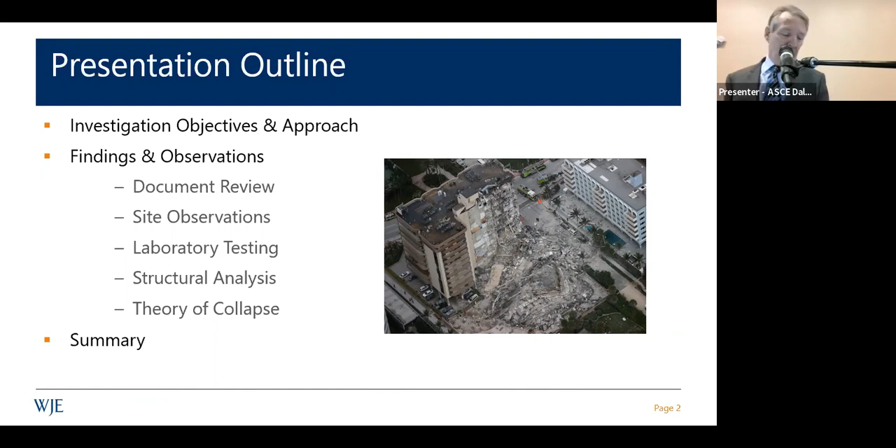I'll first outline our investigation objectives and approach, talk about findings and observations in the various activities - document review, site observation, laboratory testing, structural analysis - and then get into the theory of the collapse, and I'll try to wrap it all up in about 30 minutes.

In terms of investigation approach and objectives, fairly simple. We did these steps: reviewed documents, investigated conditions at the site, conducted laboratory studies and structural analysis, all aimed at determining the root cause. Matt Fadden and I were involved as experts in the civil litigation, and that's how we got involved in this project on behalf of the ownership of the condominium association.

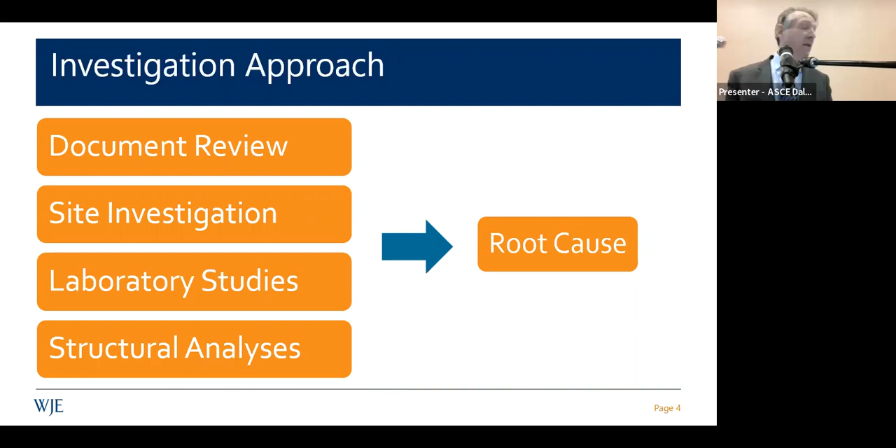Let's get right into it.

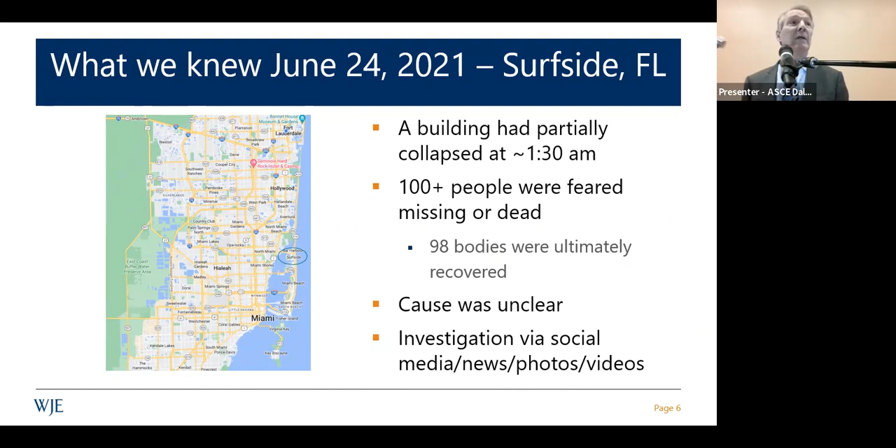Here's what we knew going in on June 24th, 2021. The building had collapsed at 1:30 a.m. Initially, 100 plus people were feared missing or dead. Ultimately, 98 people perished in the event. The cause was unclear. There was a lot of speculation, as you might imagine, in social media and other sources, some of which was actually very helpful.

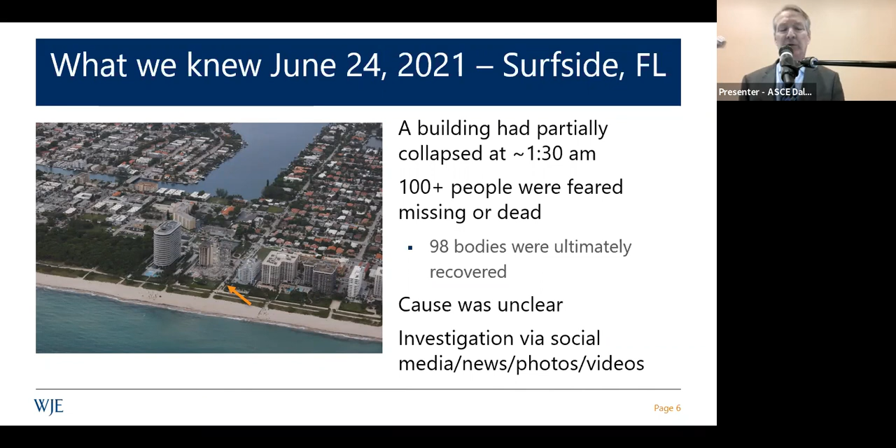Here you see the site in Surfside, Florida, which is north of Miami Beach, a very high-end area and becoming increasingly so, especially the oceanfront properties.

This is a photo after the collapse. To the right is the eastern portion of the tower, which had pancaked down, and where, of course, most of the people perished. And to the left, you'll see the swimming pool and the pool deck surrounding the swimming pool.

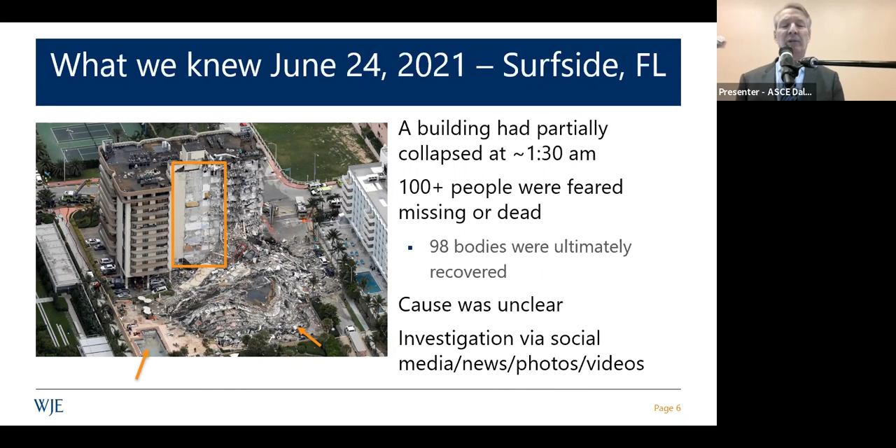It's a little hard to see at this scale. You'll see in the next slide a closer view of that pool deck, which was supported above a parking garage, and that had collapsed onto the level below. Those circled areas are columns that are poking up through the pool deck, indicating a punching type failure.

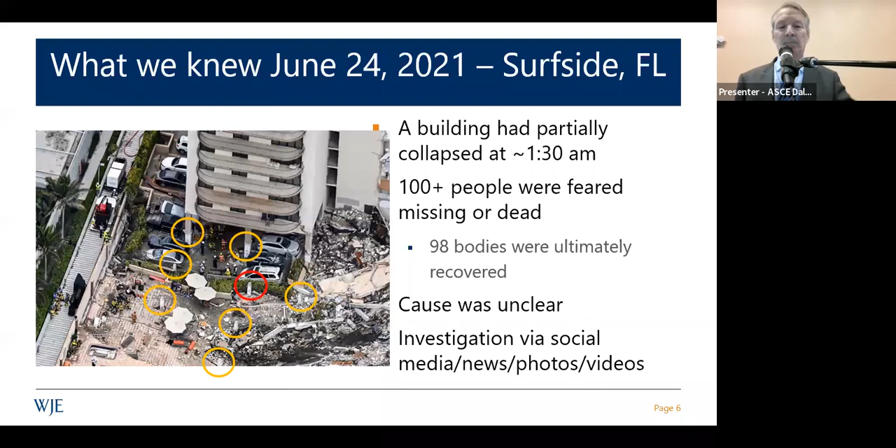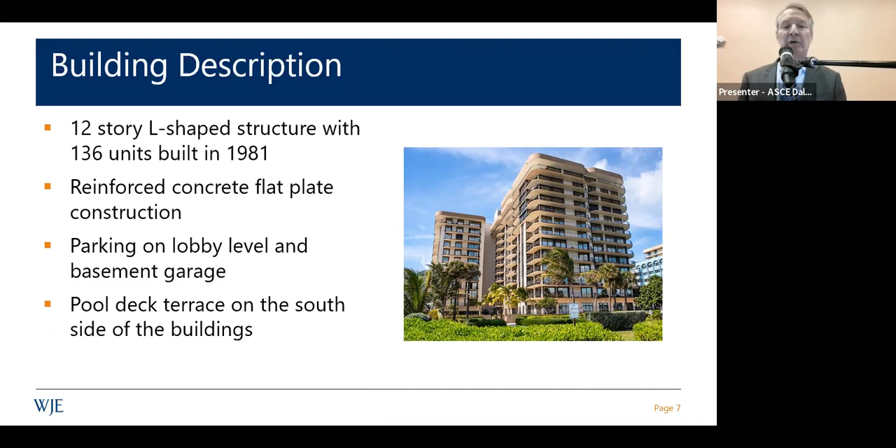The 12-story building is L-shaped in plan, 136 units built in 1981. It's a flat plate construction. There you can see what flat plate looks like if you're not familiar with it - just columns and slabs.

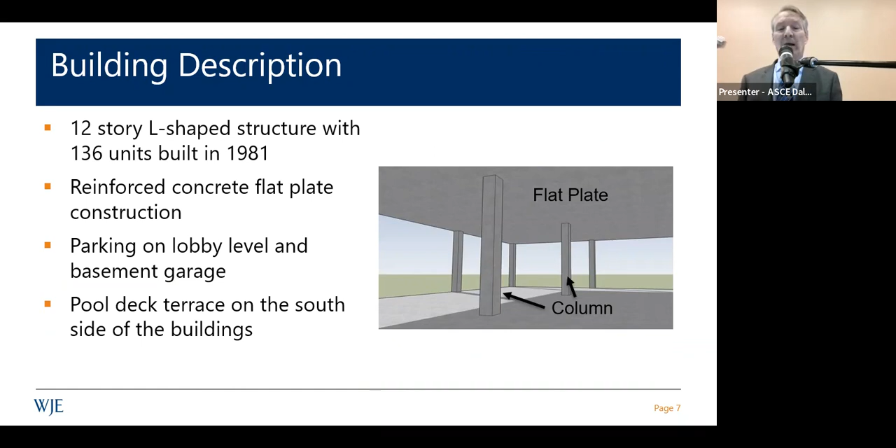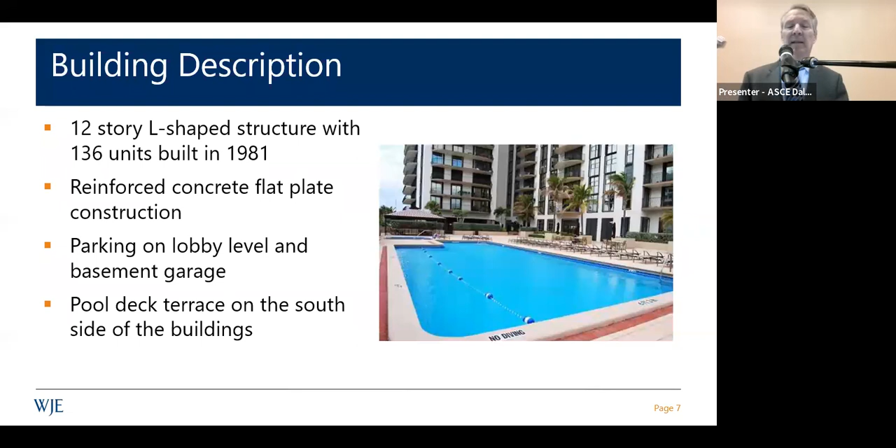There's a parking garage on the lobby level, and there you can see the parking structure and a pool deck terrace on the south side of the building. There's the pool deck and the pool and the pool deck that surrounds it. In plan view, you can see the pool deck in the southeast portion of the property and the tower that surrounds it, and the entrance area to the west.

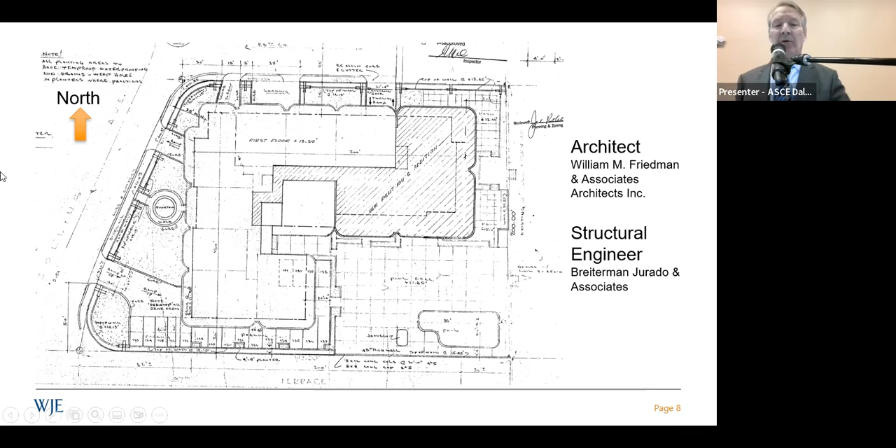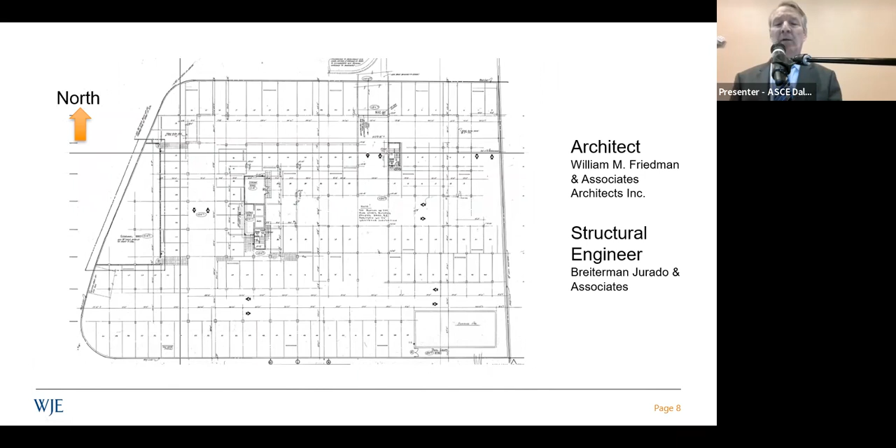We're going to talk about that entrance area in a minute, but I wanted you to be familiar with that plan. The next image is of the level immediately below this entrance level, which was devoted entirely to parking, like a lot of structures of this type. They have parking in the lower level, and that's why the pool deck was elevated. That's the point.

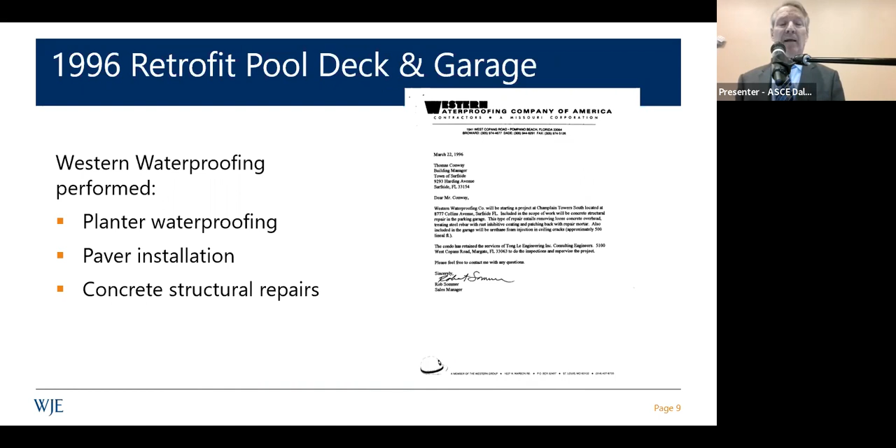Let's go through some of the history found in the documents. In 1996, there was a retrofit where there was new waterproofing, including waterproofing of the planters, installation of additional pavers, as well as concrete structural repairs. All was by Western Waterproofing, was signed off by a structural engineer. And the point is they added load in terms of new pavers in 1996. We'll get into that.

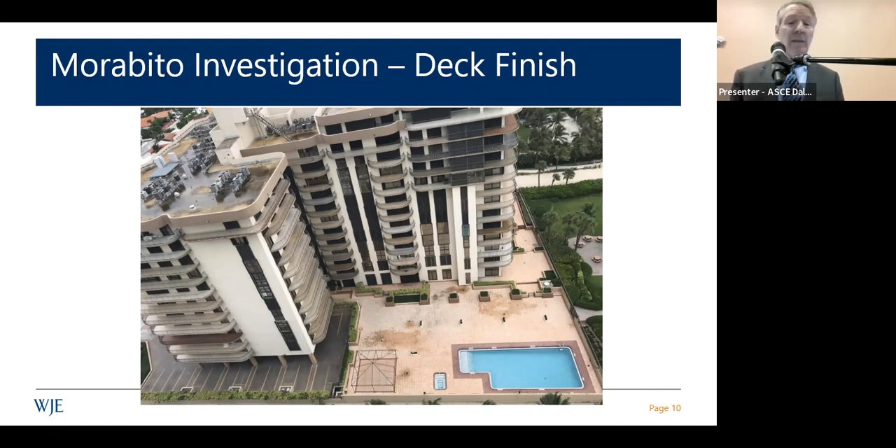The building was approaching 40 years old, and in Florida, after 40 years, you have to recertify the buildings. They hired a firm called Morabito to do that, and they were in the middle of an investigation. We learned a lot from some of the investigative work that they did.

I want you to focus in now. Here's another plan view, focus on this rectangle. I'll blow it up. In two areas, they took concrete cores, which we found to be very useful in understanding the construction of this pool deck - both in the parking area to the left and the pool deck area near the planters to the right.

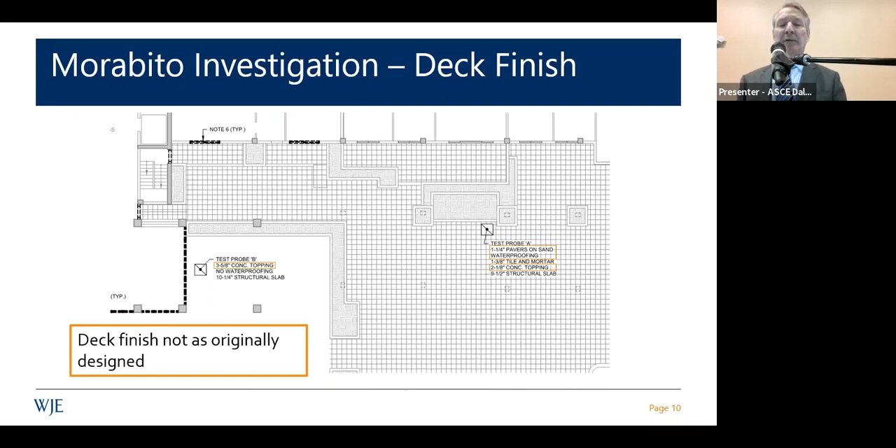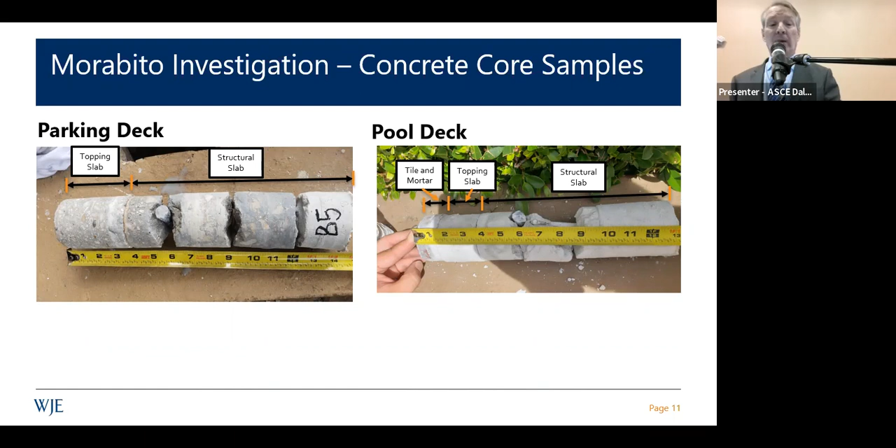Here you see the two cores that were removed, and they look all cracked up, but that's pretty common in the coring process to get these kinds of cracks. We don't believe they were pre-existing cracks. But I also want you to notice in the parking deck, the topping slab. In fact, in the pool deck, there's also a topping slab. That was not clearly shown on the original design drawings, but it was clearly part of the original construction because the tile and mortar finish was specified. So they must have known about it, but again, it wasn't on the drawings that were issued to the building department. So, thick topping slab - keep that in mind.

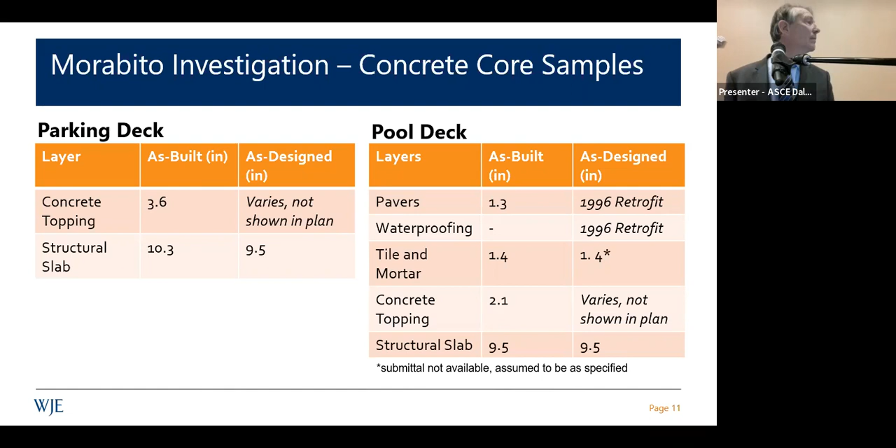Is there another way to fast forward? This doesn't work. When I raise my hand, advance the slide.

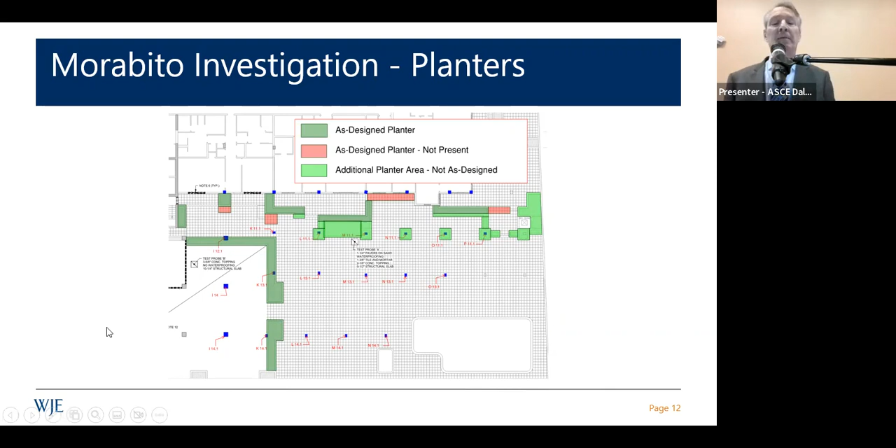One of the other things we found from the Morabito investigation is the planters weren't the same as shown on the original drawings. Those shown in dark green were original and matched what was there. In light green were added planter areas, and in that pinkish color were planters that were planned but removed. The point is there's some additional load from planters as well.

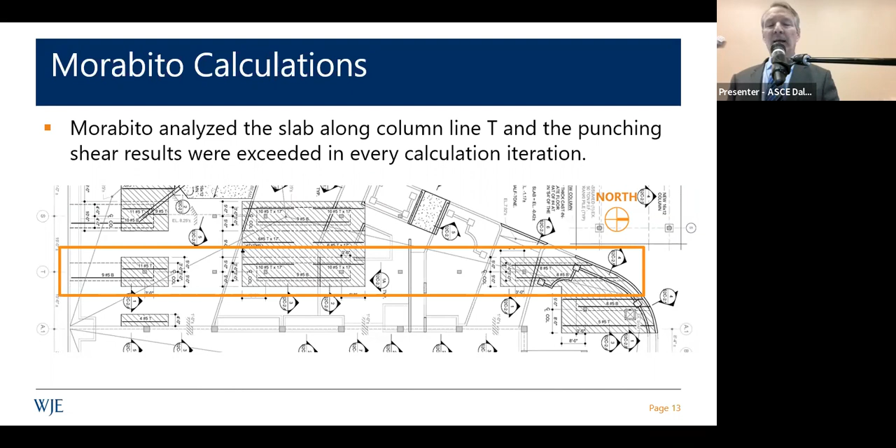In that analysis, the computer spit out the punching shear stress, and in every case it was exceeded. But apparently they did not act on that particular finding or ask the same question of whether punching shear was exceeded elsewhere in the structure.

It has to do with the original design. I just lost all my slides. Maybe we should take questions at the end, but that's a great question. I'll get into that before we're done.

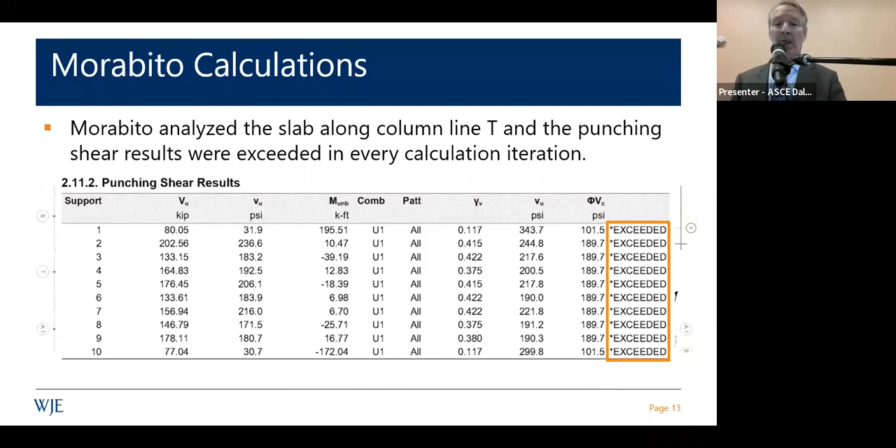There was a walkthrough video of the structure that we were able to get hold of, and that told us a lot about the pre-existing conditions before the pool deck collapsed.

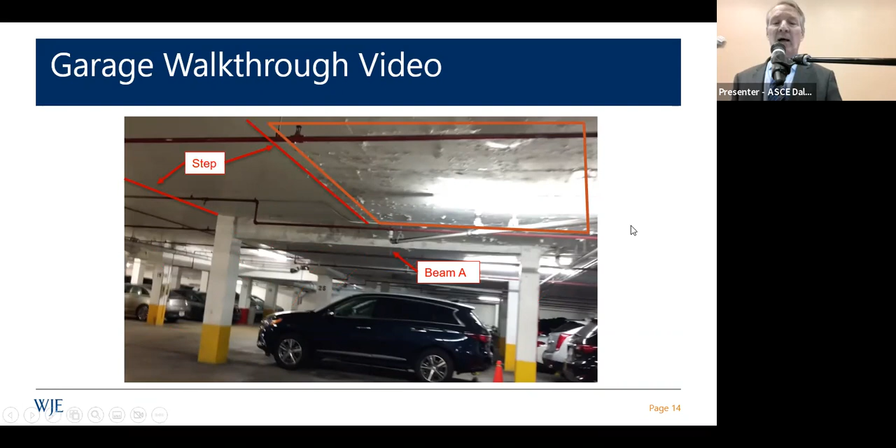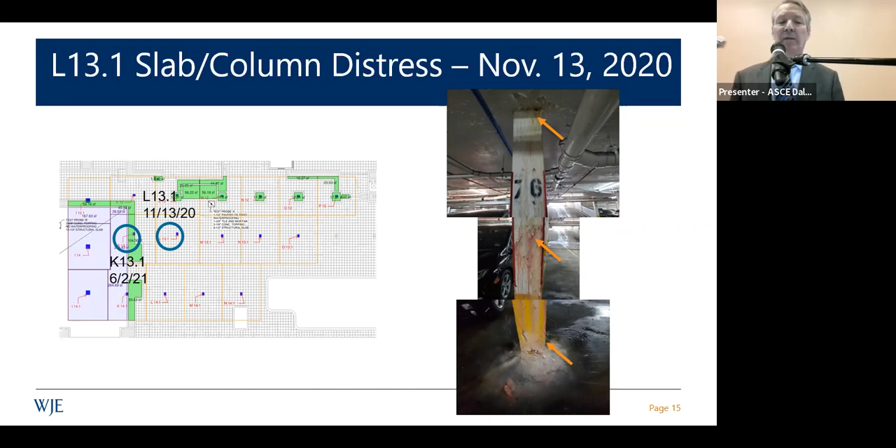In that video, we were able to piece together that mosaic photograph on the right, and at column L13.1, circled in the diagram on the left, there's a lot of water coming through at that column, and you can see the deposits at the base. That can happen when there's punching shear distress, or shear cracks in the vicinity of the column, and water can find its way through those cracks. Not exactly a smoking gun, but some indication that there may have been a pre-existing problem.

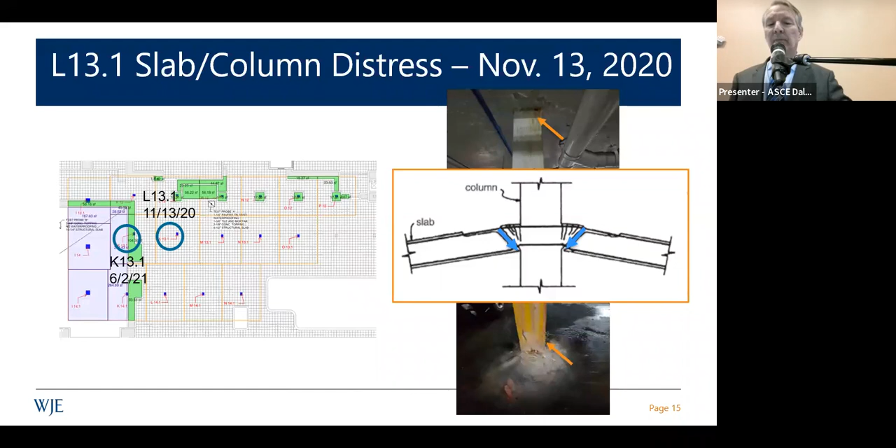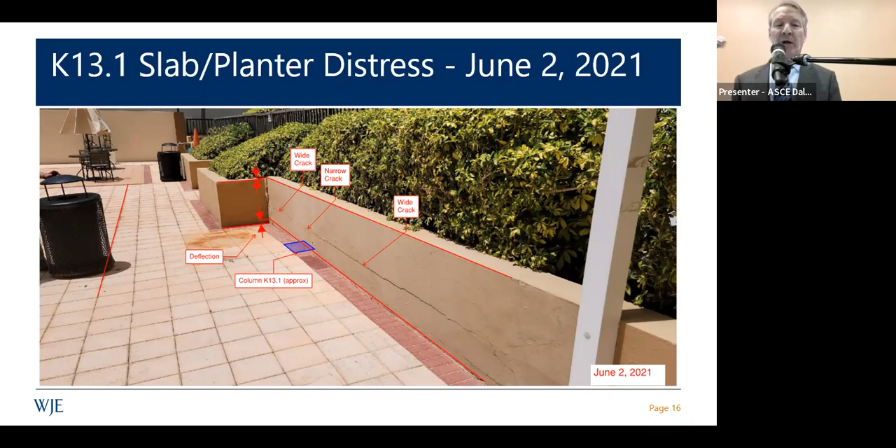That garbage can you see at the far left was removed so they could take that photograph, and you can see the rust-stained area from the garbage can. There's a close-up of the faulting. Unfortunately, that was noticed but dismissed as something to do with the planter itself, not the underlying structure.

This slide is from April 2020. The previous slides were from June 2021, just three weeks before the collapse. Now here we have a year or so earlier, and none of that distress exists, right?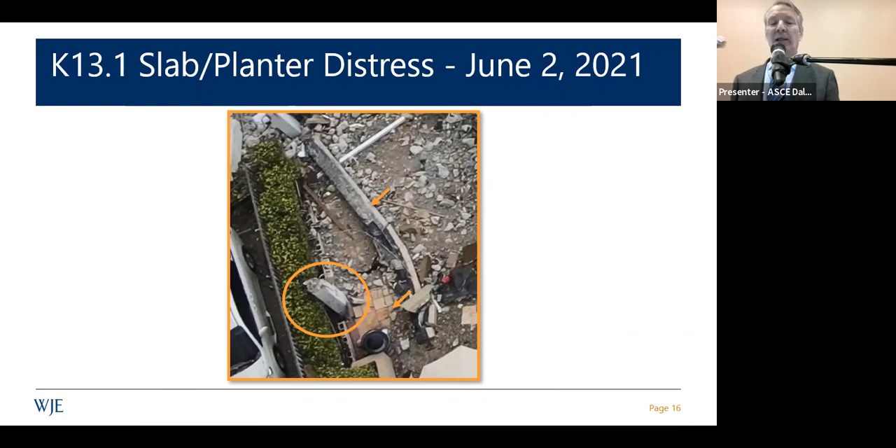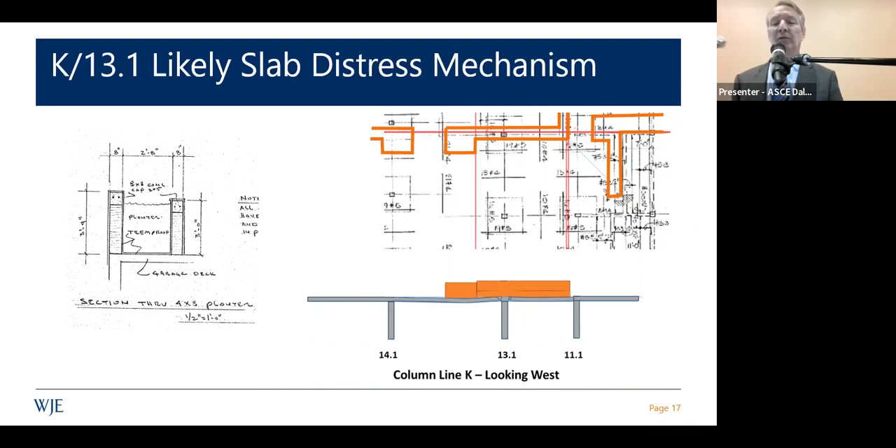So what we think happened is those spans had begun to sag as there was rotation near column 13.1. A blow-up of that sketch shows the horizontal cracking in the planter walls, as well as the faulting between the two sections of the planter, consistent with significant structural distress that was pre-existing.

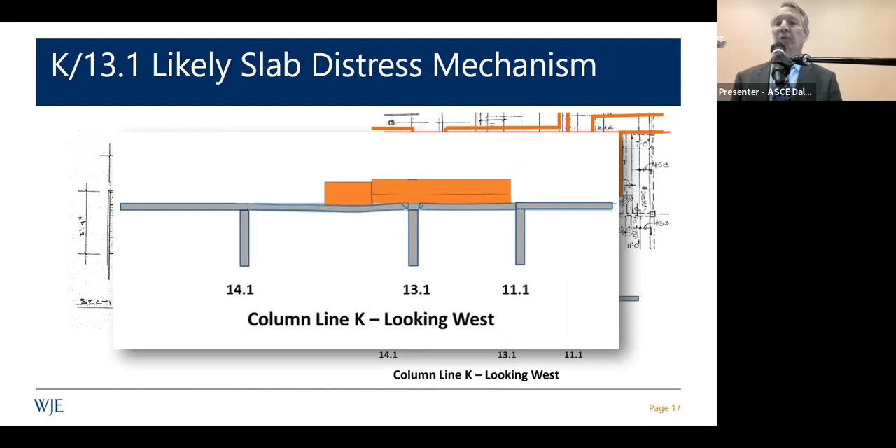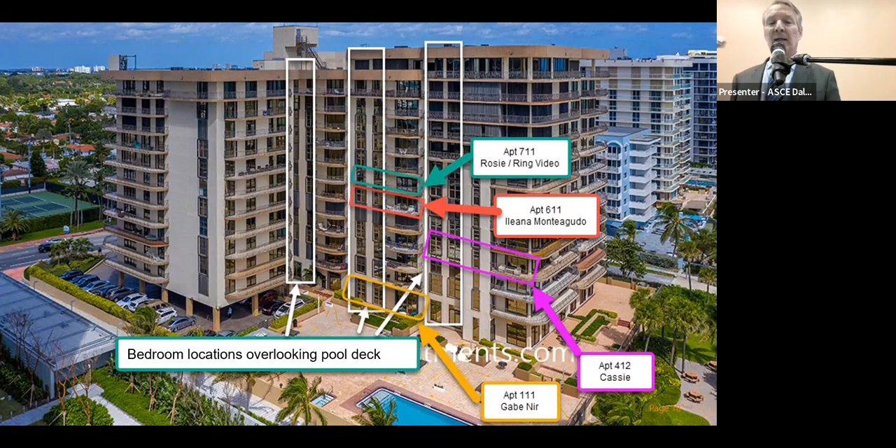This is a little bit tedious, but there were several events between 1:10 and 1:15 or so that related to the pool deck collapse. The security guard felt rumbling and saw white dust in the air, and heard a very loud noise. The building began to sway, and guests in the Bluegreen Resort, which is to the north, heard a loud crash and felt the rush of air rushing from the garage.

All those were consistent with the pool deck collapse. Now, it's not until 7 to 12 minutes later that you have the building collapse, and there were 3 columns you'll see from these videos. I'm going to focus on these 3 events, starting with the guests at the Bluegreen Resort.

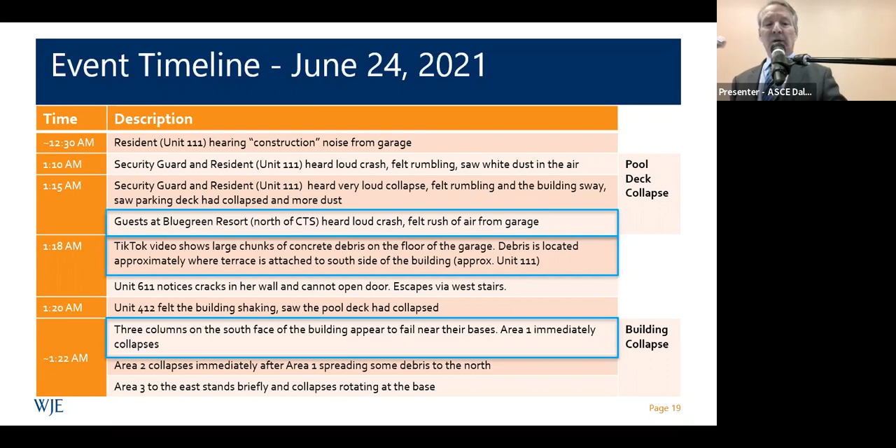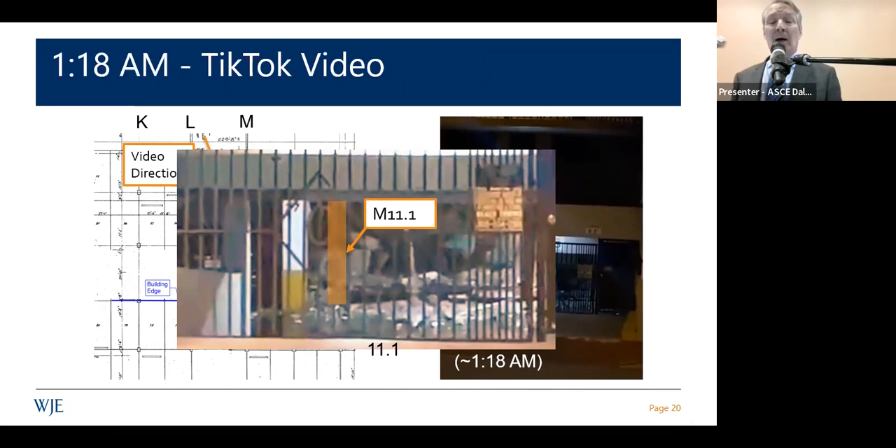This is a video taken from the north looking into the parking garage at 1:18 a.m. We did the best we could to enhance that photograph, and you can see the debris already lying on the parking garage floor. You can see a couple of columns in the garage. One column in particular was not there, may have been knocked down - we're not entirely sure. At this point, the building is surviving, but the pool deck had collapsed.

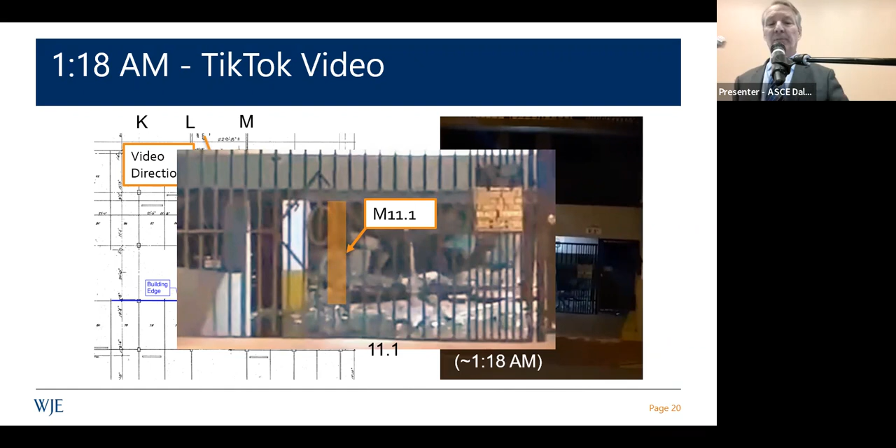Now we have a Ring video from Unit 711, which also overlooks the pool deck. This is kind of in between time, between the pool deck collapse and the building collapse, right in that 7 minute span or so. There's a lot of distress 7 floors above the pool deck collapse, indicating significant subsidence of those columns, but not immediate collapse.

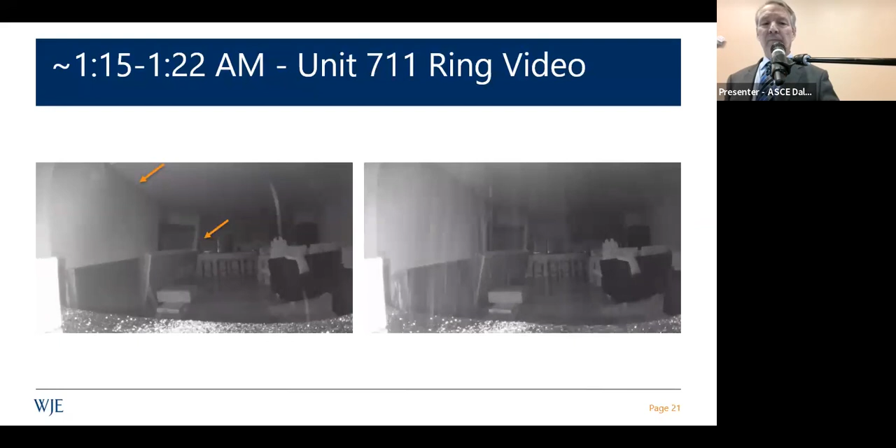Then by 1:22 a.m., we have this video from a security camera. You can see the Champlain Towers in the background on the video excerpt on the left. When you study that video, you see that the collapse started - it's in progress at this point - at the base of those columns on the south side of the tower, in the central portion, area 1, if you will. In the illustration on the right, area 0 is the pool deck. Area 2 subsequently collapsed, followed shortly thereafter by area 3.

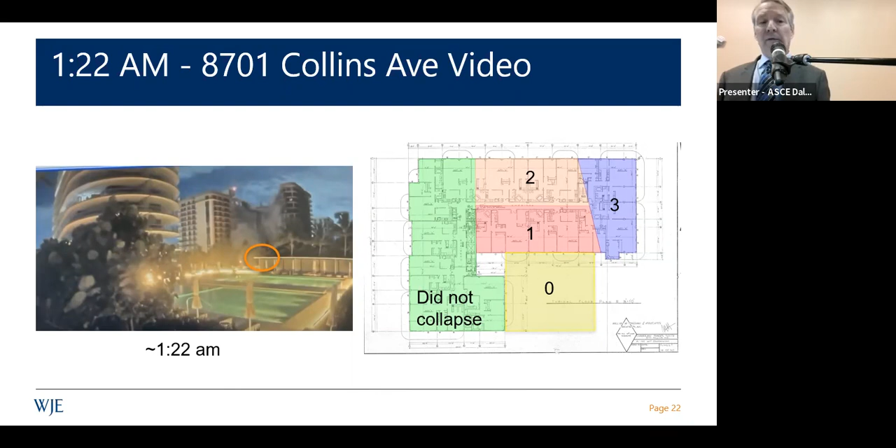So let's talk now about the site observations. This is the view of the site as we encountered it. We didn't get access until October of 2021. At that point, all of the debris had been removed by the National Institute of Standards and Technology.

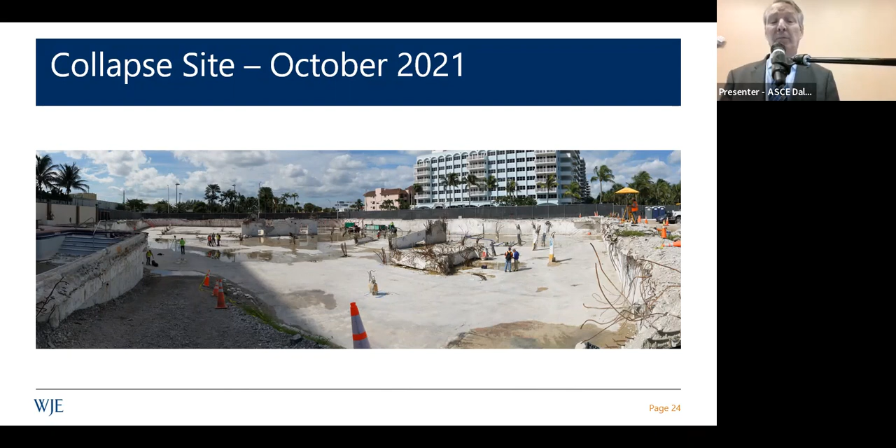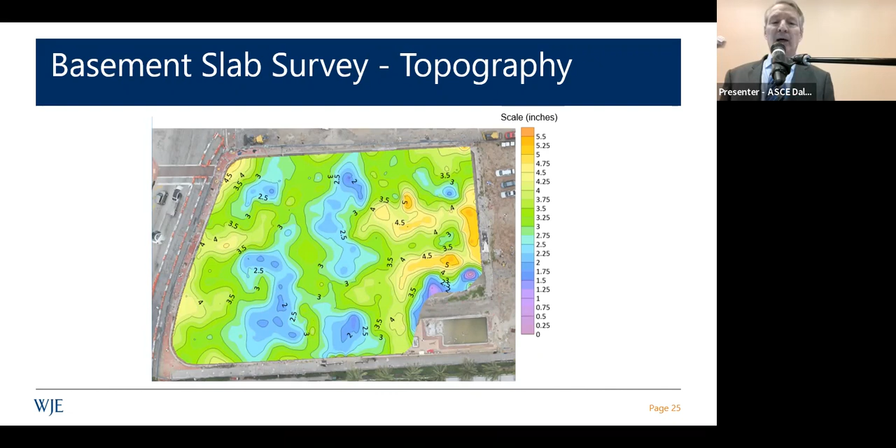But then we were free to do whatever site investigation, along with, in cooperation with a number of other engineering experts representing various parties in the civil litigation. One of the first things we did was a survey of the base of the basement slab, the parking garage slab essentially. This is the survey results, and it was extremely flat. There was a lot of speculation, as can happen in karst formations in South Florida, that you have a foundation failure of some type, but that was not indicated by this survey of the basement slab.

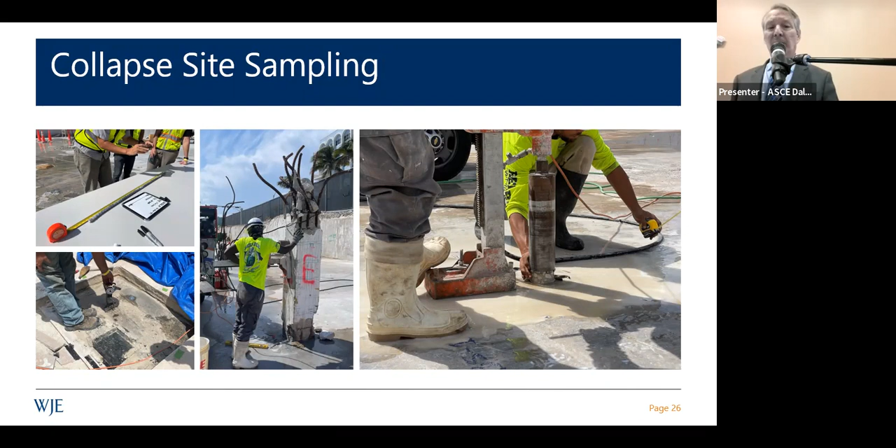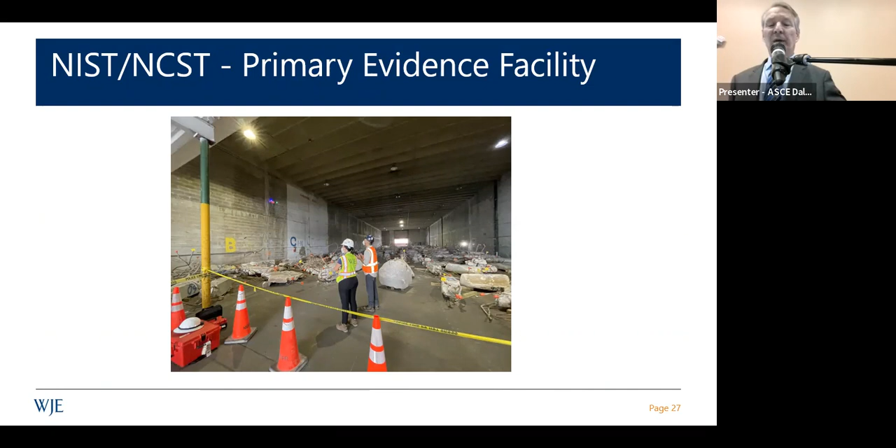We did a lot of sampling at the site of the concrete and the reinforcing, several borings of the foundation, and I'm going to summarize what came out of all that. We also had access to what's called the primary evidence facility. NIST arranged for fragments to be removed and saved in a warehouse, and there you see a couple of our engineers in that warehouse. They were able to make this drone mosaic, if you will, of the specimens laid out in the primary evidence facility.

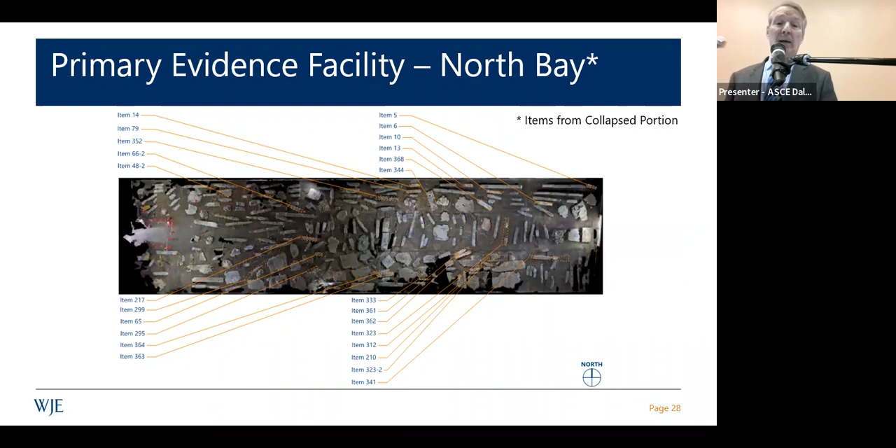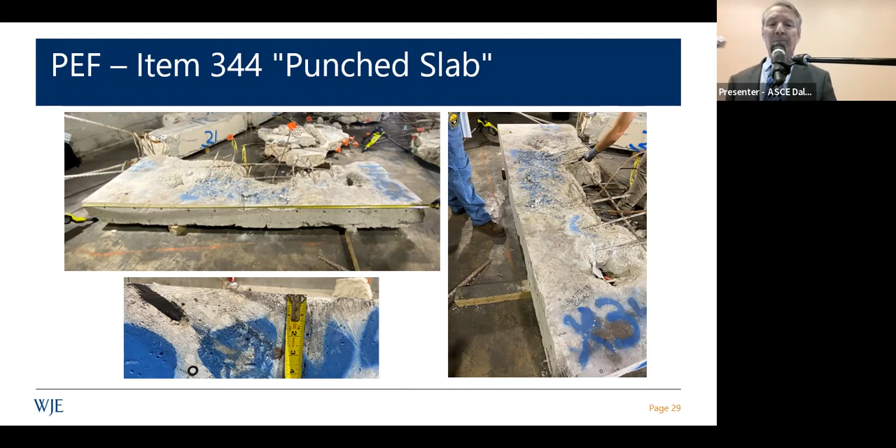That's one of the slabs that was at the primary evidence facility, and its appearance was consistent with punching failures.

Then the question is, how did this punching failure lead to the building collapse? I want you to look at the photograph in the middle lower section, a 3D image. It shows how the pool deck connected to the building in those 2 steps. The green beam is referred to as beam A.

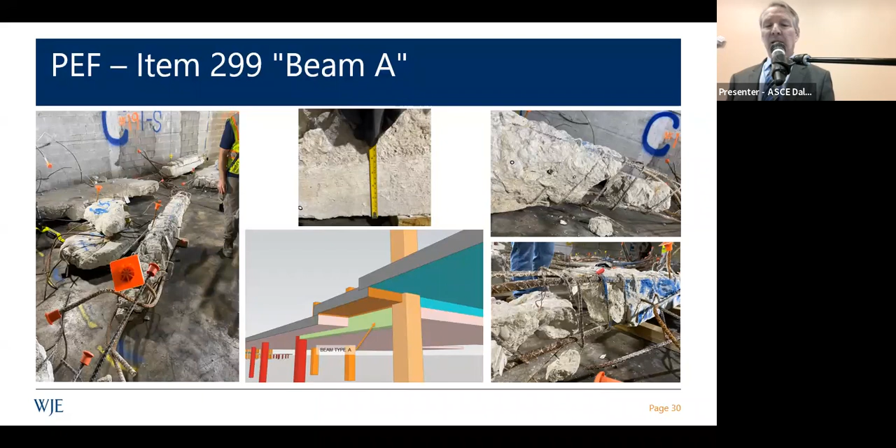What you're seeing are photographs of beam A, which were really too badly destroyed to learn very much. There were also portions of the column at the south edge of the building. This photograph shows that column at the connection at beam A, and that divot taken out of that column section shows that the depth of the reinforcing was more than expected.

Remember, this is at the top of a column where they're going to have a joint, and we're going to lap a lot of number 11 bars together. And apparently the cage was moved over such that there was pretty excessive cover. That becomes important for reasons I'll explain in just a minute.

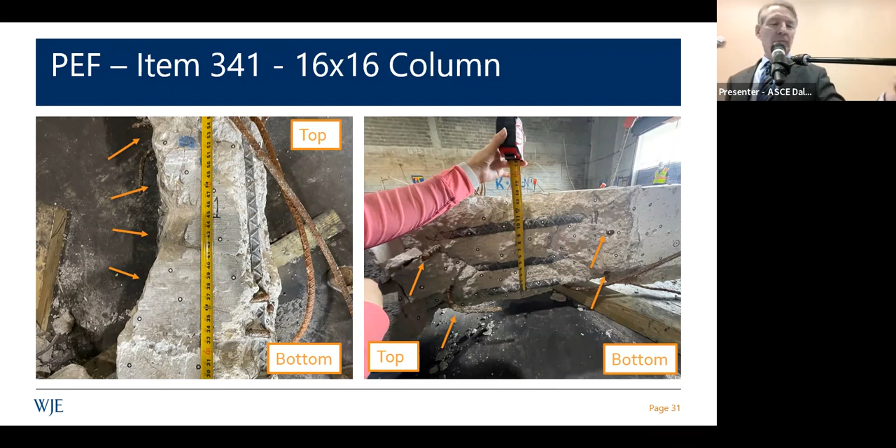So what do we find from all this? The concrete was typical to Florida. The corrosion was consistent with that at the time of concrete placement. No evidence of advanced corrosion we could find at the primary evidence facility, but there was some corrosion at the site nonetheless. Chloride levels were low, very little carbonation, and the steel and concrete strength were about as expected.

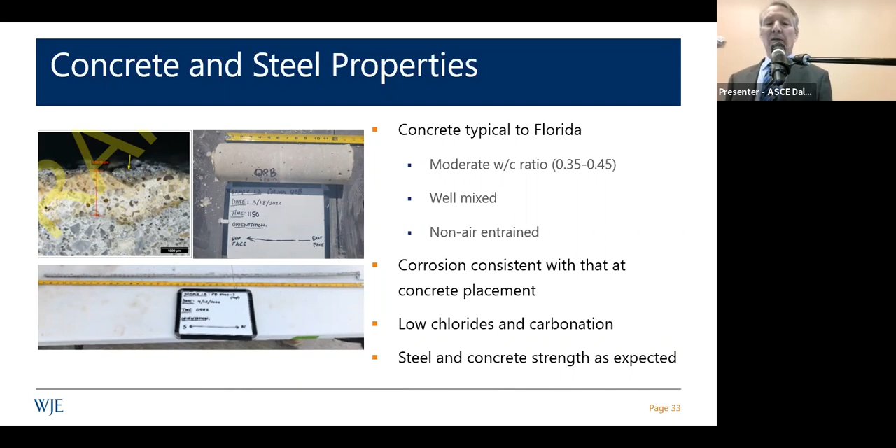So as I said, we're dealing here with punching shear failures. We believe that's what started it all, probably at the column circled in red, which is K13.1, where I showed you earlier had evidence of distress in advance of the collapse.

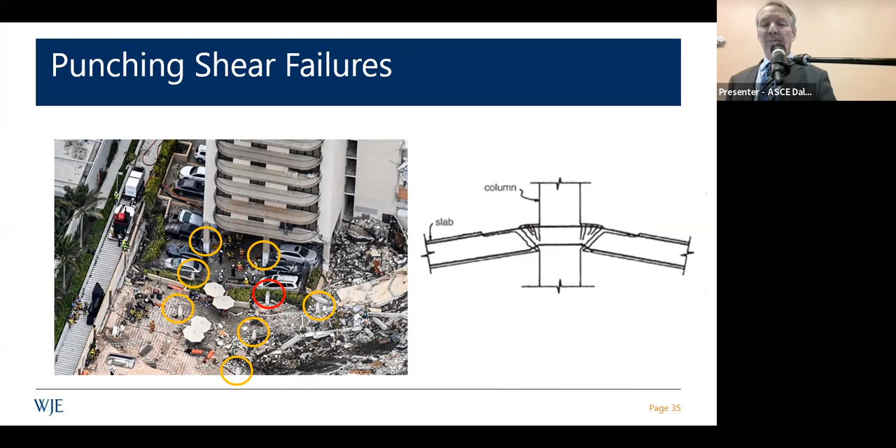When you do a design review in accordance with the 1977 ACI code, which was the relevant code, you find that it did not meet the design at the time by quite a margin, both with respect to bending moment and punching shear. Those red cells are ratios of demand to capacity, and they go as high as 1.9 or even 2 in some locations, particularly along the K line. So it was not designed correctly.

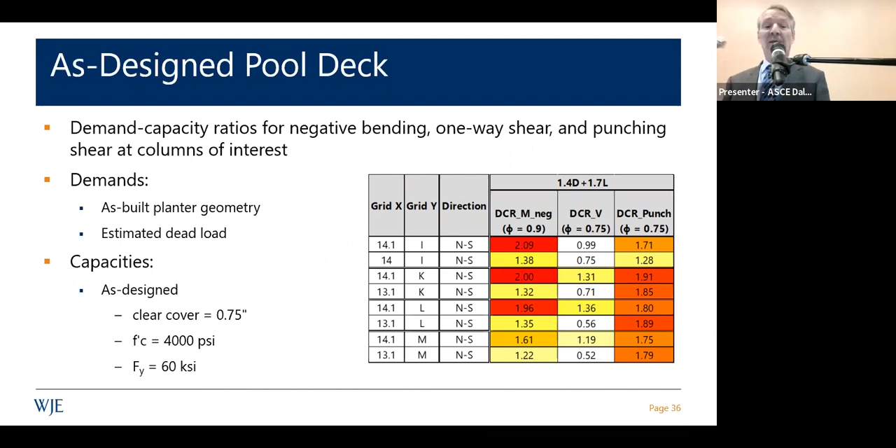This is also evidenced in this shot where we did a finite element modeling, and you see at the first interior main longer span that the positive bending stress is much higher than it should be.

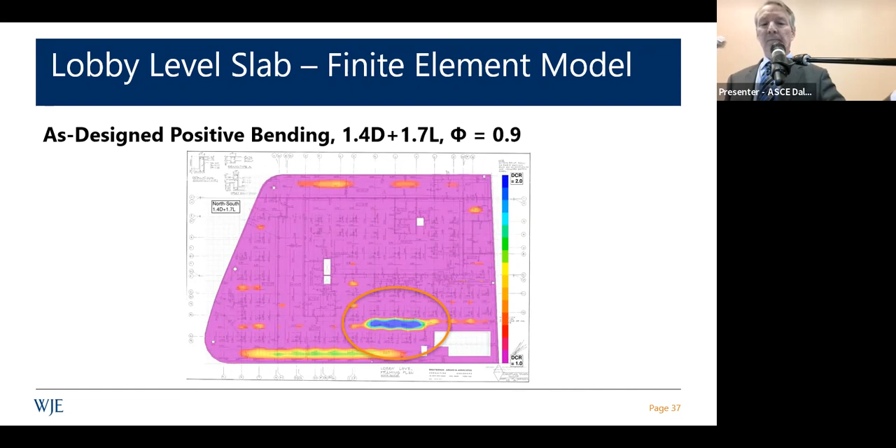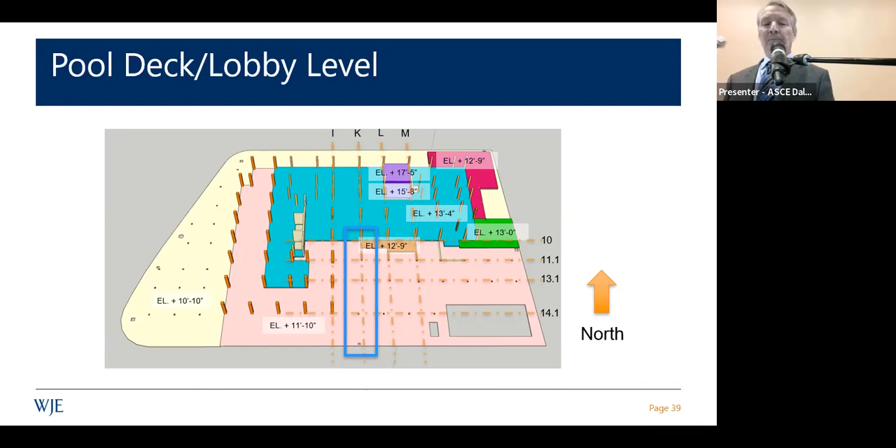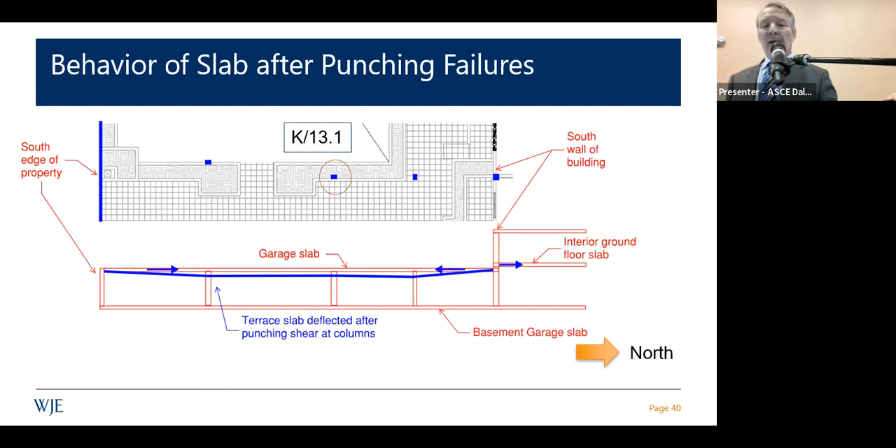As those punching shear failures develop, the slab, shown in blue, begins to drop down. As it does, it goes into kind of a catenary behavior. At the south side of the building, shown at the right here, there's a lot going on. You get both catenary action and bending that wants to pull out beam A from those columns.

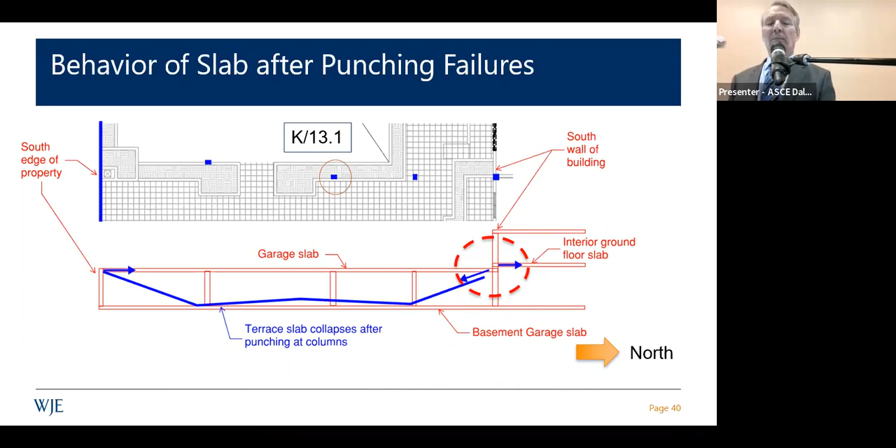So as that beam collapses, it pulls out a chunk of concrete out of that column. This is speculation at this point, but it's consistent with the evidence, and we know it's also consistent with what NIST is thinking at this point. Then that column subsides, and it subsides and holds for a few minutes, as evidenced by the video, before it totally collapses.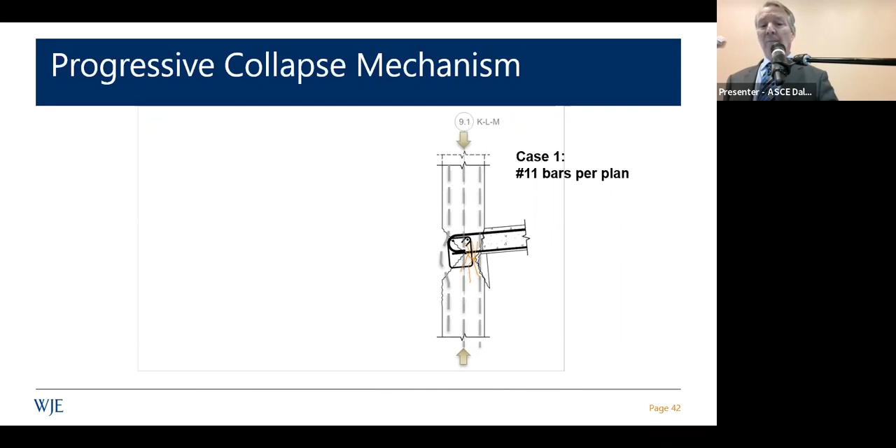Now, in a second case, if that reinforcing cage for the columns is shifted to the right, that makes it even easier for that chunk of concrete to pull out. We may never know what the specific conditions were at the column in question.

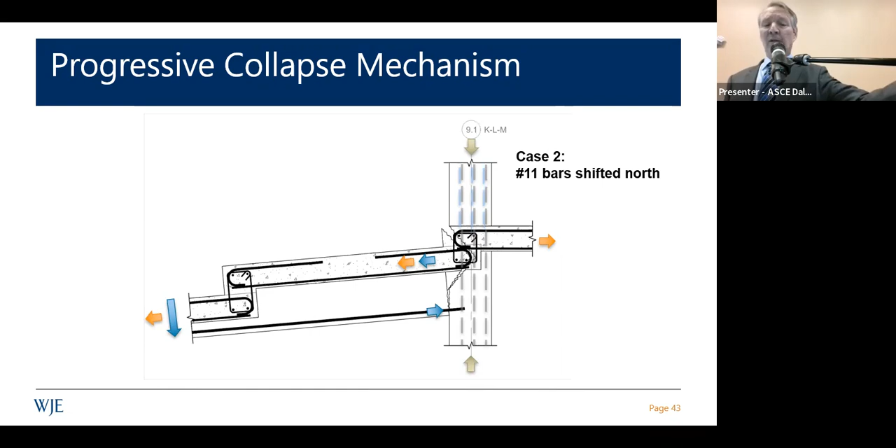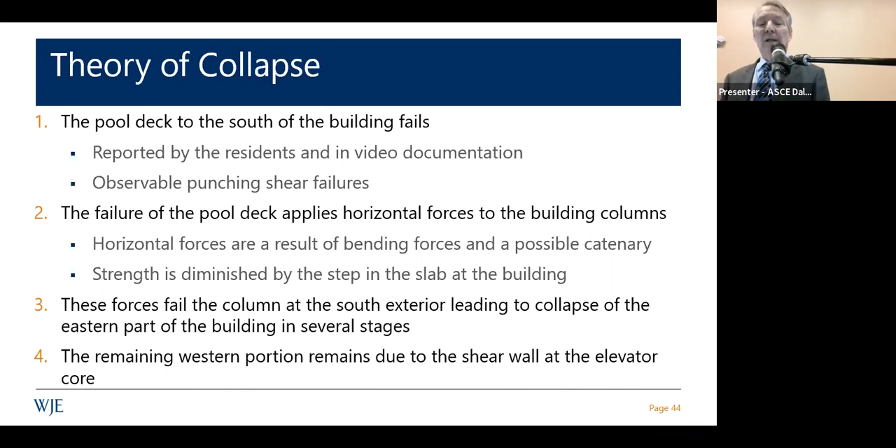So then the theory of the collapse is the pool deck to the south of the building fails. That's supported by the residents and video documentation and the observed punching shear failures. Then because of those horizontal forces and catenary forces I just discussed, the strength of the column is diminished at that connection, leading to collapse of the south exterior columns and ultimately the eastern part of the building in several stages: initial subsidence, then the collapse of areas 1, 2, and 3. The western portion of the building remains intact, protected, if you will, by the shear wall at the elevator core.

So what mistakes contributed? First and foremost, the inadequate design of the pool deck slab, especially for punching shear, in accordance with the 1977 code. Second, there was excess weight on the pool deck: the addition of pavers, larger planters than originally shown, and a concrete overlay that was known at the time of construction, though it's not sure if it was known to the engineers. And thirdly, shallow top reinforcing, decreasing the effective depth and enhancing the likelihood of a punching shear failure.

All those things combined, even in the absence of live load at the time of the collapse, are sufficient to explain the collapse. And we'd be remiss if we didn't mention the mistake that the engineers responsible for the recertification failed to identify the warning signs from their own analysis and some of the distress that was evident.

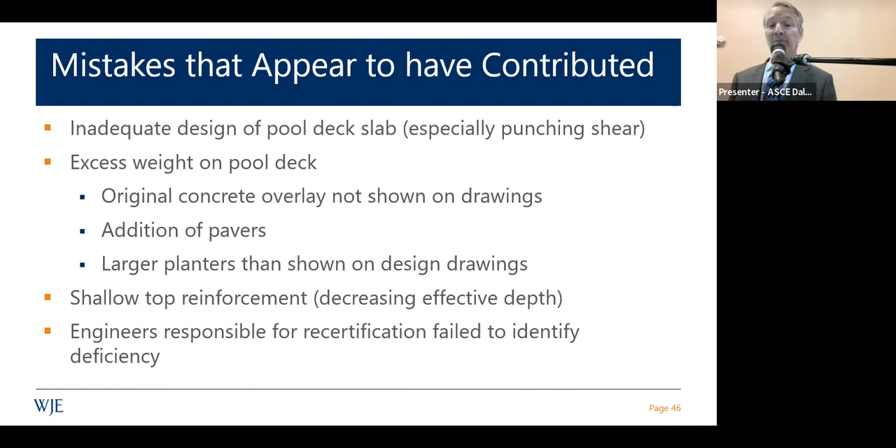So there are some other contributing causes. One is long-term sustained load. Concrete fails at a lower stress if the load is sustained, and the dead load was sustained for more than 20 years, including the new pavers.

Low top reinforcement ratio - what I mean here is the amount of steel clustered around that column was proportioned according to the 77 code. The code now requires more of a concentration of reinforcement. There was water buildup in the planters, perhaps, and corrosion. We don't really know to what extent that was significant - we didn't see any strong evidence of that, however.

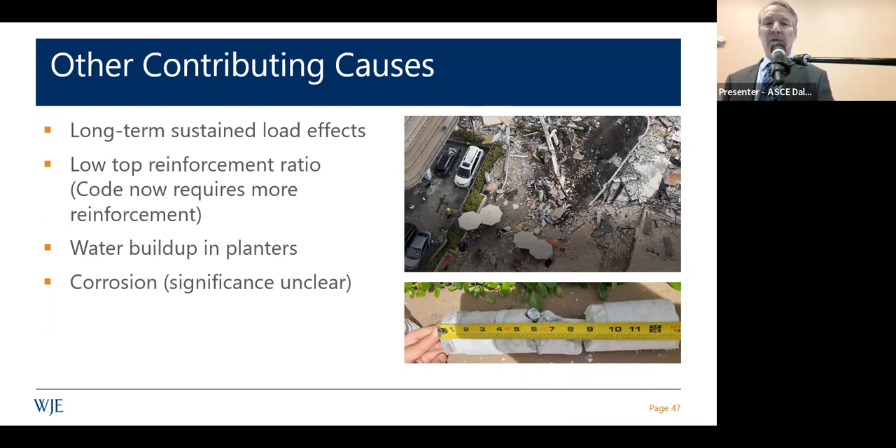So that's it, as to why it collapsed. I'd be happy to take any questions, time permitting.

You mean for the recertification process? Yeah, so they did the analysis of that area to the west where they had some additional loads, and that was the result of those analyses. But when their own analysis shows that the punching shear stress is exceeded, they didn't take that additional step to say, well, maybe it's exceeded elsewhere in the parking deck or the pool deck, which is very unfortunate.